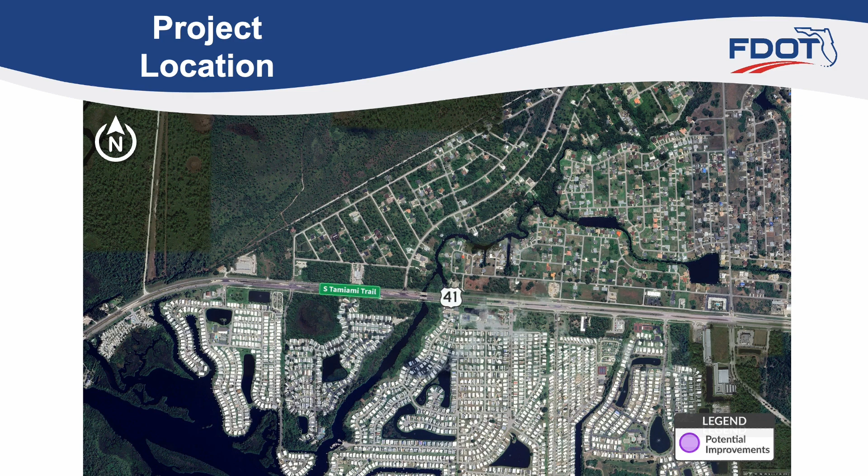FDOT is considering improvements at multiple intersections along US 41 in North Port. Improvements are being considered at 6 intersections along the corridor: Lazy River Road, Riverwalk Drive, De Miranda Avenue, De Leon Drive, Palm Harbor Drive, Blackburn Boulevard, Ortega Place, and El Prado Avenue. Additional improvements include constructing a southbound left turn lane at El Prado Avenue and lengthening the southbound left turn lane at Ortiz Boulevard.

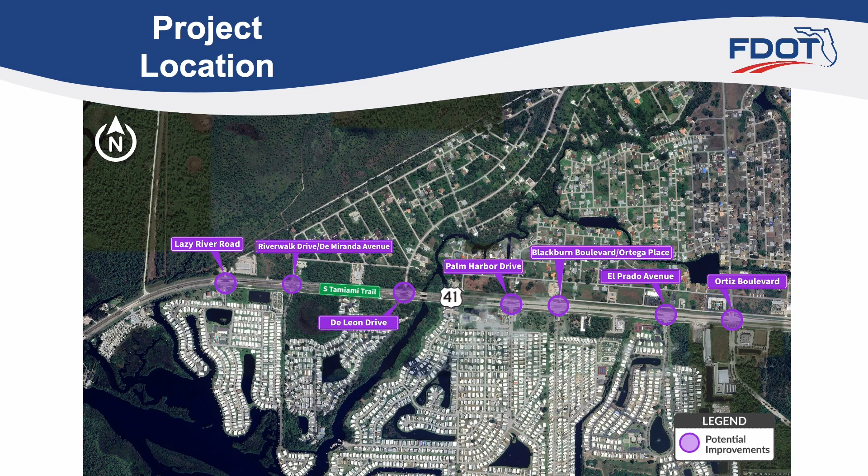These intersections are primarily surrounded by residential properties along US 41 and side streets with some commercial properties located along US 41. Within the project limits, US 41 is a 4-lane divided roadway with a grassed median. The posted speed limit is 55 miles per hour from Lazy River Road to Blackburn Boulevard and 45 miles per hour from Blackburn Boulevard to Ortiz Boulevard.

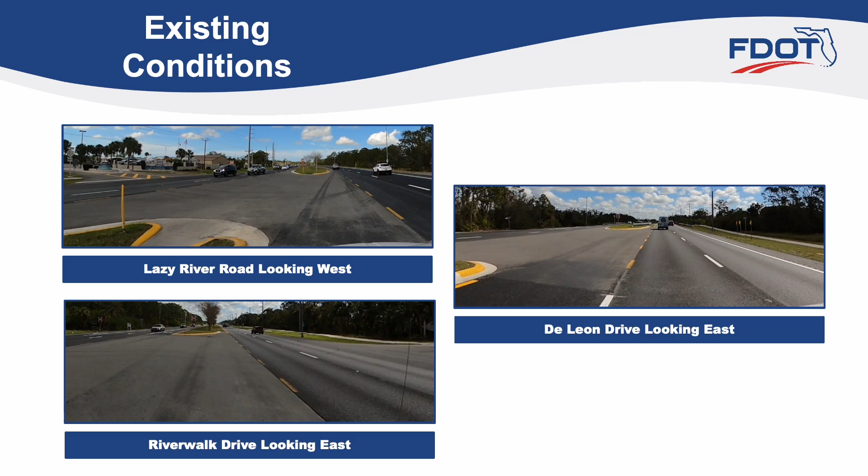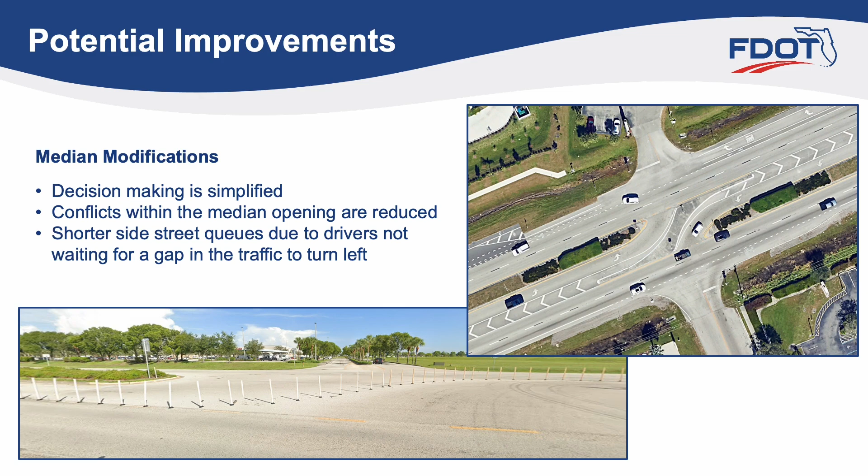The purpose of this project is to improve safety, enhance traffic flow, and reduce crashes along US 41 by managing access at the project intersections. This includes converting the existing full median openings to directional median openings. These safety improvements will simplify the decision-making for drivers by reducing the conflicts and crashes within the median openings. Conflict points are locations where vehicle paths legally cross, creating potential crash sites. These points are common when vehicles enter or exit a roadway. Directional medians help reduce conflict points along a corridor. In an open median, unrestricted movements from side streets increase conflict points, including risks for pedestrians and cyclists.

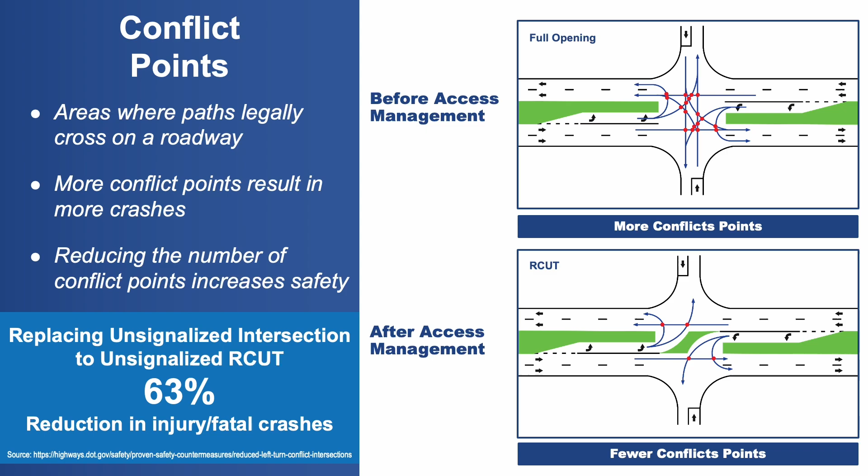A directional median opening, as shown here, limits left turns and through movements from side streets. Instead, vehicles turn right onto the main roadway and make a U-turn at a designated opening. This is called a restricted crossing U-turn, or R-cut. The R-cut simplifies navigation for drivers, reducing exposure to high-speed cross traffic. According to the Federal Highway Administration, FHWA, R-cuts reduce injury and fatal crashes by 63%.

Currently, the full median openings on US 41 allow left turns from both the main roadway and side streets, creating potential conflicts when multiple vehicles enter at once. The potential directional median opening separates opposing traffic, allowing only vehicles on the main roadway US 41 to turn. Left turns and through movements from side streets would not be allowed. For an east-west roadway like this segment of US 41, the design includes separate openings, one for eastbound left turns and U-turns, and another for westbound left turns and U-turns.

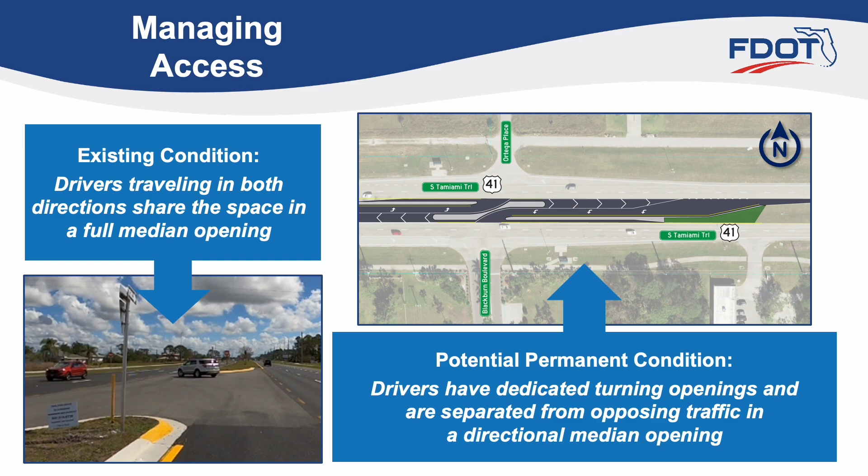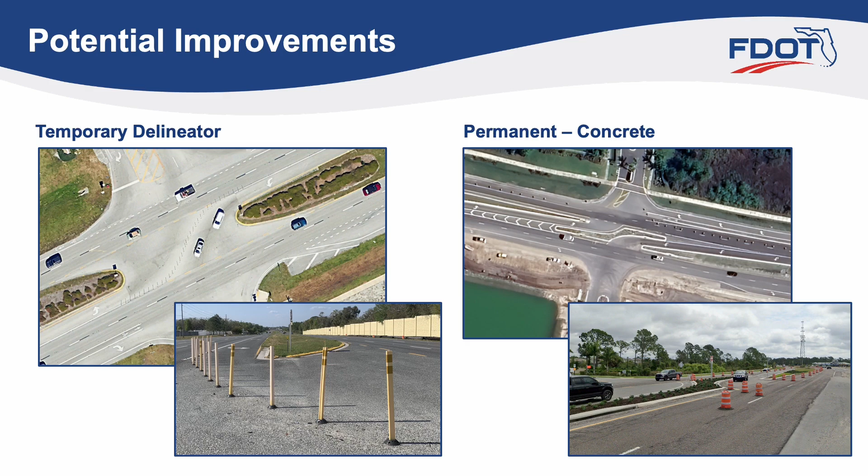This project is considering temporary and/or permanent improvements at each intersection. Temporary improvements include the installation of delineators. Permanent improvements at each intersection include replacing delineators with a concrete directional median opening. We will now discuss each of the intersections, providing the temporary and permanent improvement concepts, historical crash information, and rerouted turning movements. At each location, northbound and southbound left turning and through movements from the side streets will be rerouted to median openings or signalized intersections to the east and west.

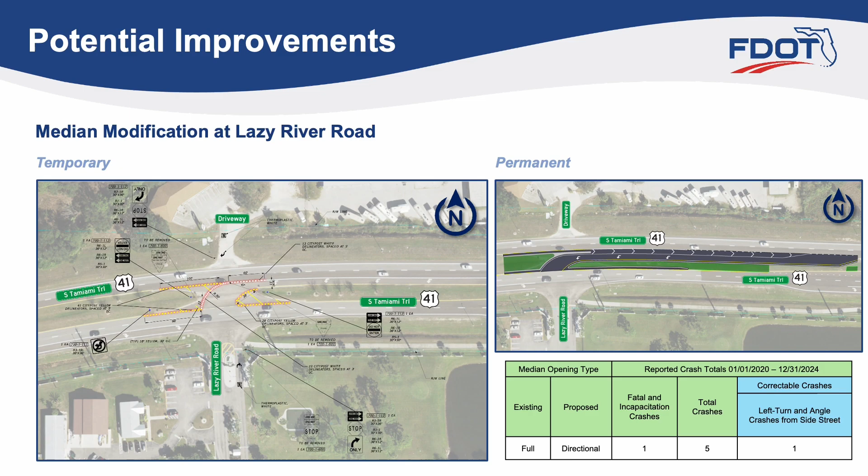At Lazy River Road, from year 2020 through 2024, there were a total of 5 crashes, including 1 fatal or incapacitating injury crash. Based on these historical crashes, 1 crash would be considered correctable at the intersection with the construction of a one-way directional median opening in the westbound direction. At Riverwalk Drive, De Miranda Avenue, from year 2020 through 2024, there were a total of 10 crashes, with none of these crashes resulting in fatal or incapacitating injuries. Two of these crashes would be considered correctable with the construction of a two-way directional median opening.

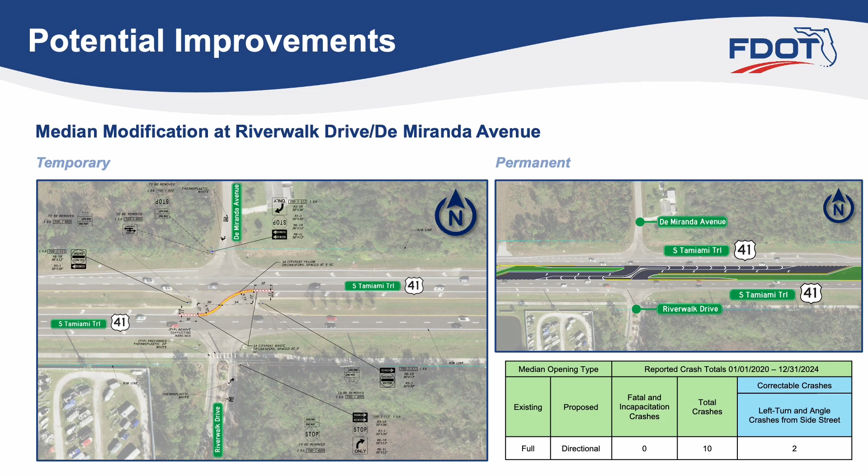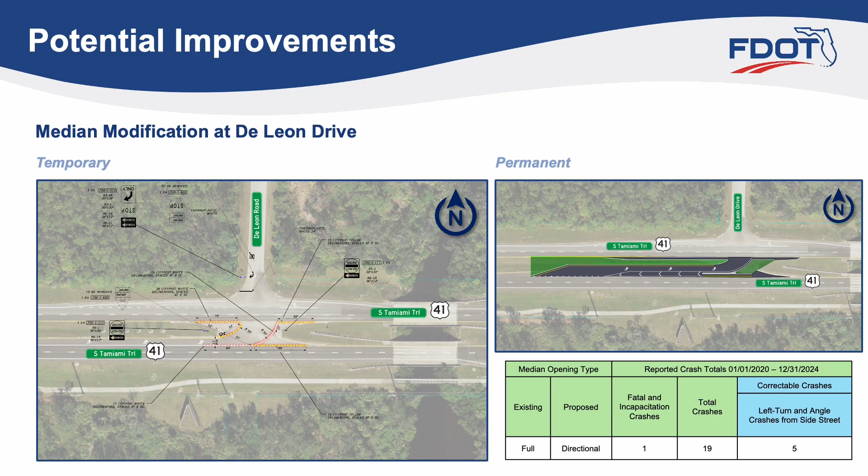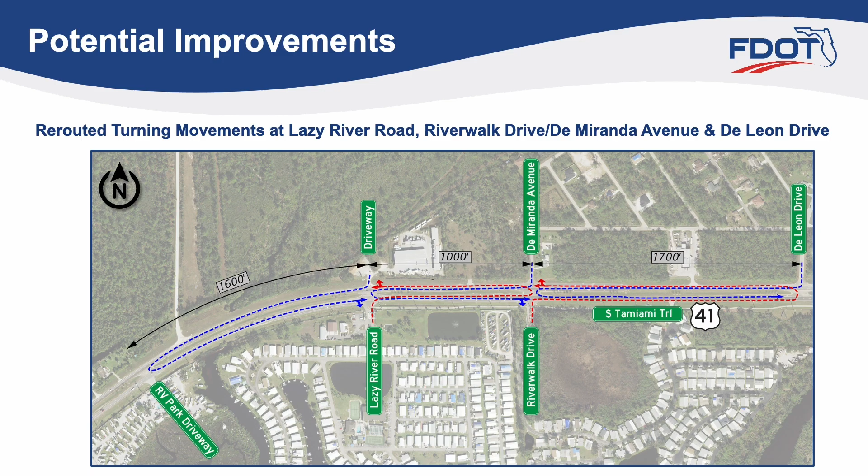At De Leon Drive, there were 19 crashes in the 5-year period, with one of these crashes resulting in fatal or incapacitating injuries. 5 of these crashes would be considered correctable with construction of an eastbound one-way directional median opening. Northbound and southbound left turning and through movements at the 3 locations will be rerouted to the adjacent median opening to make a U-turn.

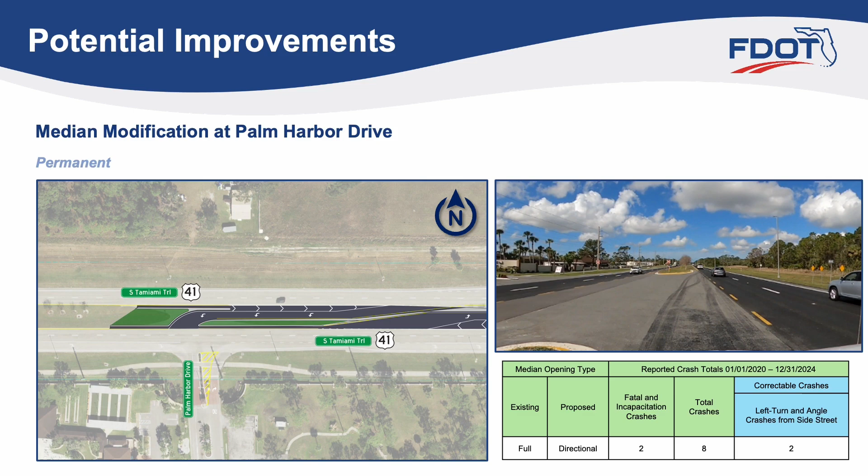At Palm Harbor Drive, there were a total of 8 crashes in the 5-year period, with 2 of those crashes resulting in fatal or incapacitating injuries. 2 of these crashes would be considered correctable with construction of a one-way directional median opening in the eastbound direction. Based on the 5-year crash data, 14 crashes occurred at Blackburn Boulevard, Ortega Place, including 1 fatal or incapacitating injury crash. 3 of these crashes would be considered correctable with construction of a two-way directional median opening.

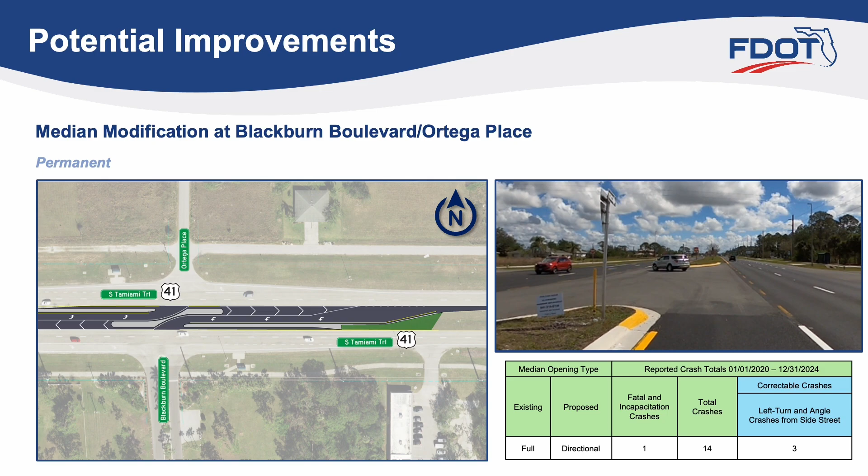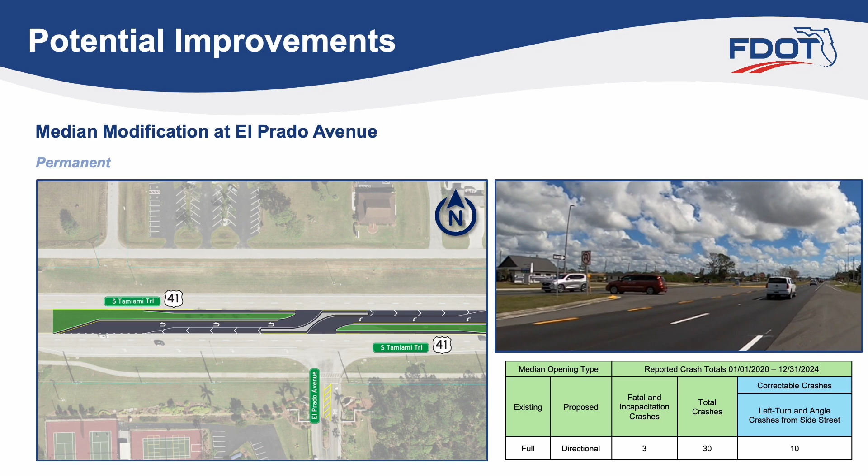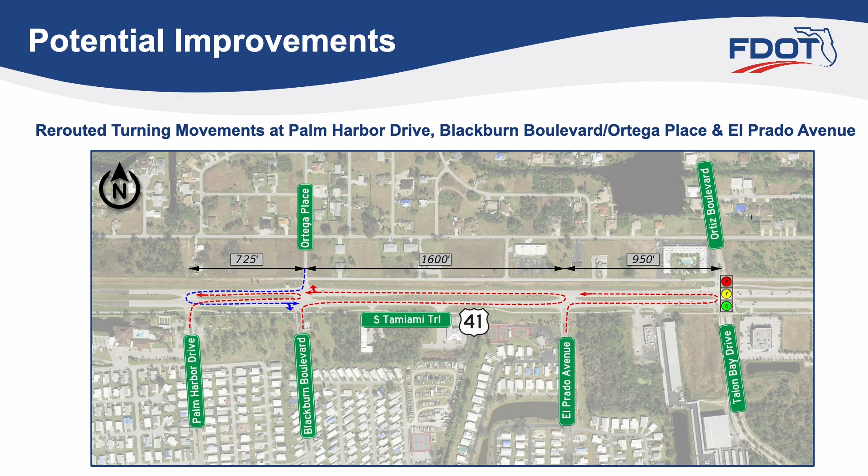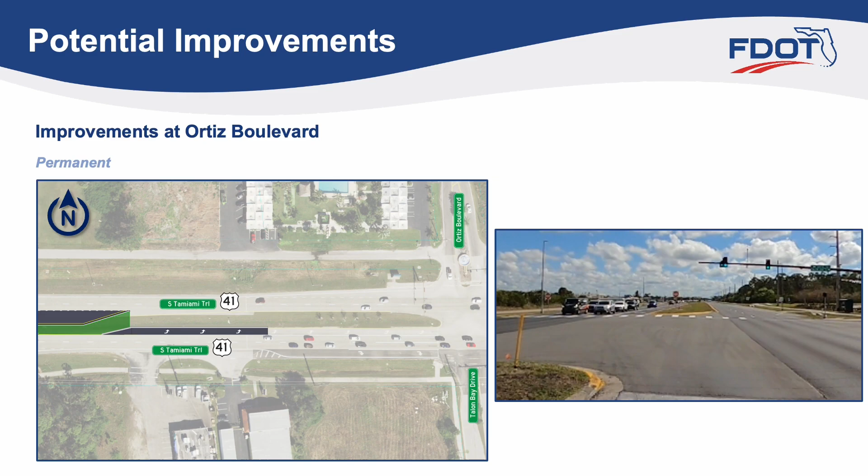Today, we are conducting both the virtual and in-person public meeting for these safety improvements. Moving forward, design of the temporary improvements is in progress and anticipated to be complete in late 2025. Construction of the temporary improvements is anticipated to begin in late 2025 at an estimated cost of $92,000. Design of the permanent improvements is ongoing and construction is currently unfunded.